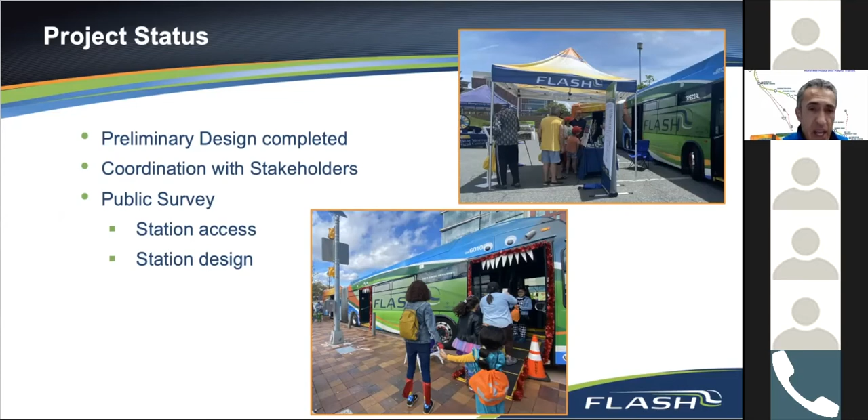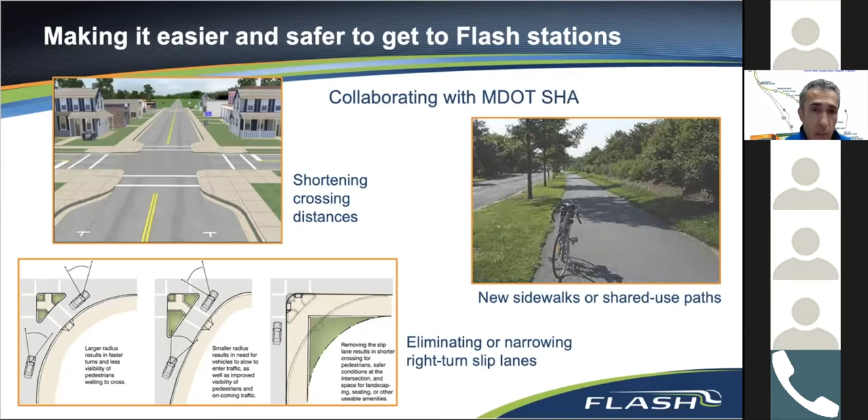These next few slides show some of the, I'll call them, changes as far as the geometric design we've looked at. I want to reiterate that the station locations have not changed, but what we tweaked or adjusted were things like the Q-jump lanes or issues having to do with pedestrian safety.

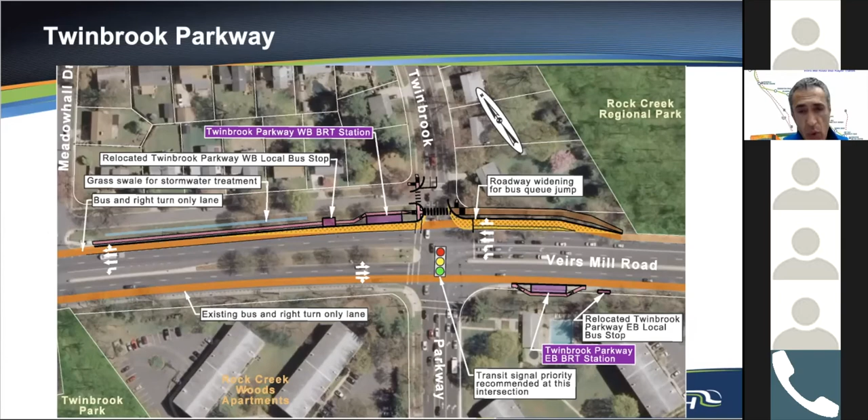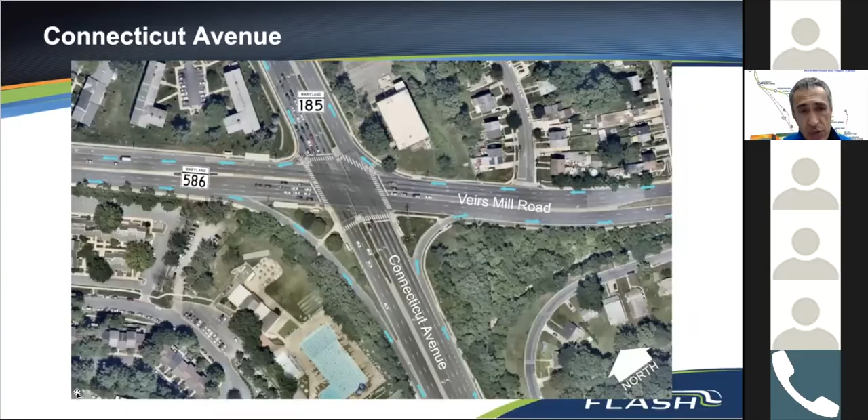This is Connecticut Avenue, and this is probably where we have the most significant geometric changes to what's existing today. If Scott can run the video, thank you.

This is the existing condition. If you look, there are slip ramps where cars are using to avoid the intersection. Now what you see is the modified version of the intersection where all the slip ramps have been eliminated. The longest one was from eastbound Veirs Mill Road going southbound on Connecticut Avenue. That long one has been eliminated, rerouted and shortened, and pretty much everybody has to stop before making the right turn.

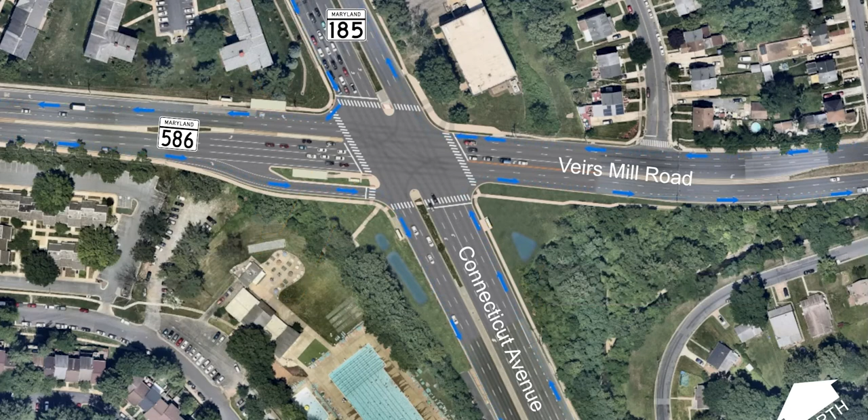Among the improvements are enhanced crosswalks and smoothed out, much easier to use sidewalks for pedestrians. The BRT station is what we call a floating station, in an island, as Scott is pointing out, and next to it is the relocated eastbound bus stop.

This intersection, on this slide, it's not as readily visible, but we also took advantage of removing the existing slip ramps and found space, or room, to put stormwater management facilities. So where there used to be slip ramps, now there's going to be a few stormwater management facilities. That's one of them that Scott was pointing to.

This is probably the intersection with the most significant geometric modifications once the project is completed. Next.

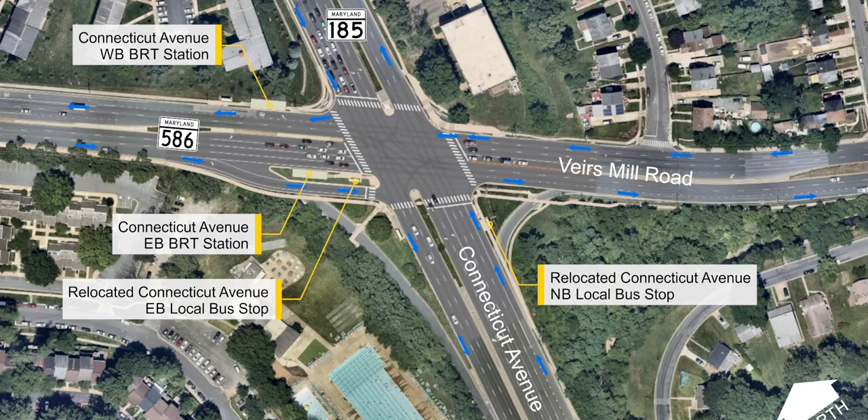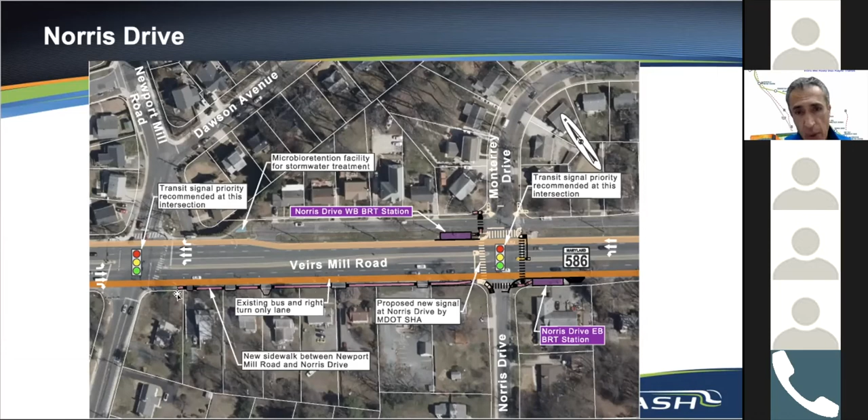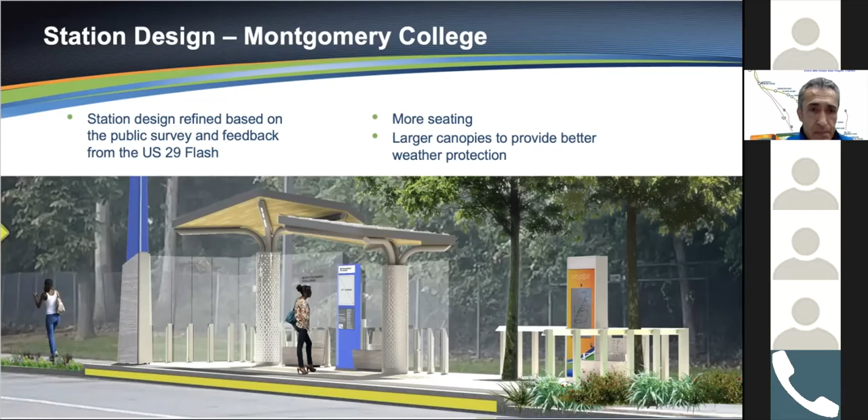And this is the proposed station on Randolph Road.

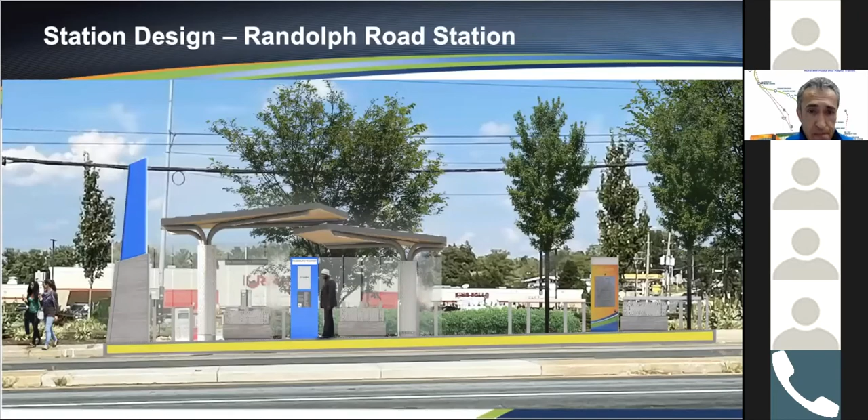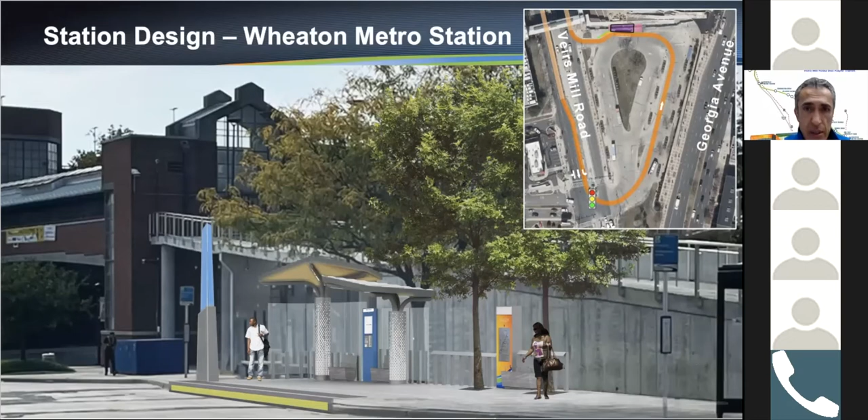Finally, this is the station at the Terminus Point, the Wheaton Metro station. In the image in the upper right-hand side, that's an aerial view. The orange line shows the path of the BRT line as it comes and circulates through the parking lot. What you see are all the various WMATA bus stops or Ride On bus stops along that route, and the purple one is the proposed BRT station. It is fairly close to the access to the metro station. So that is the location of the BRT station for Wheaton, and the image you see is the proposed design of the station. Next.

This is a good point to stop to take any questions you may have on what I have covered so far.

Michael, there was a question from Mike Stein. He says the county's bicycle plans imagine shared use paths along Veirs Mill Road between Twinbrook Parkway and approximately Twinbrook Metro Station. Have you considered installing those as part of the Veirs Mill Road project to improve access for cyclists and pedestrians? Thank you, Mike, for that question.

If I may say, sorry, this is Mike. I think I might have mistyped. I meant along Twinbrook Parkway, not along Veirs Mill Road. That's fine, I'll still address the question as though it was posed. In a manner of speaking, you jumped the gun — some of the topics we were going to talk about include pedestrian and cyclist facilities. If you just wait a few seconds, it might be better for me to cover it when we reach that point, so I will talk about that then. Thank you.

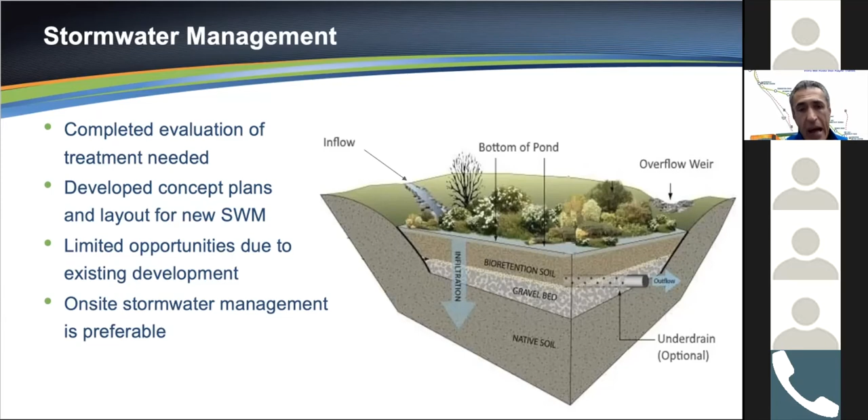I forgot to mention in the last slide, there are a couple of places where we have what we call offsite facilities. Most of the places where we are proposing these treatment facilities are along the corridor, or on-site. We do have a couple of small off-site facilities that are outside of the right-of-way corridor of this project.

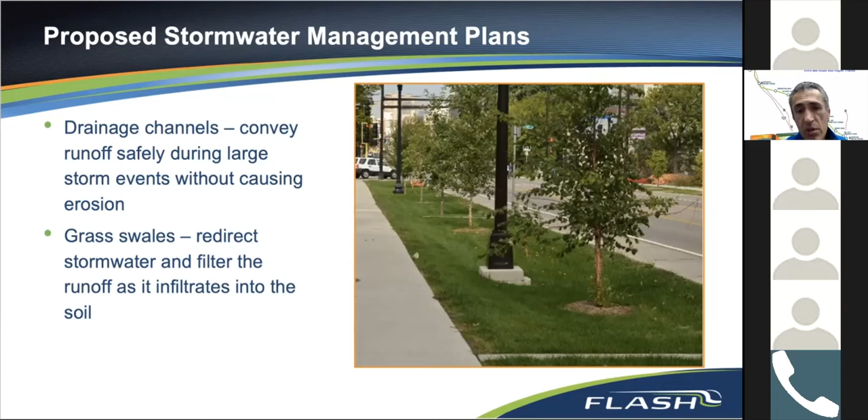That's the beauty of it, if I may use that expression - to the layman's eye, it just looks like grass or landscaping. But in fact, it is meeting the stormwater management needs and treating the runoff from the project. All of this reduces erosion, and the water is being treated.

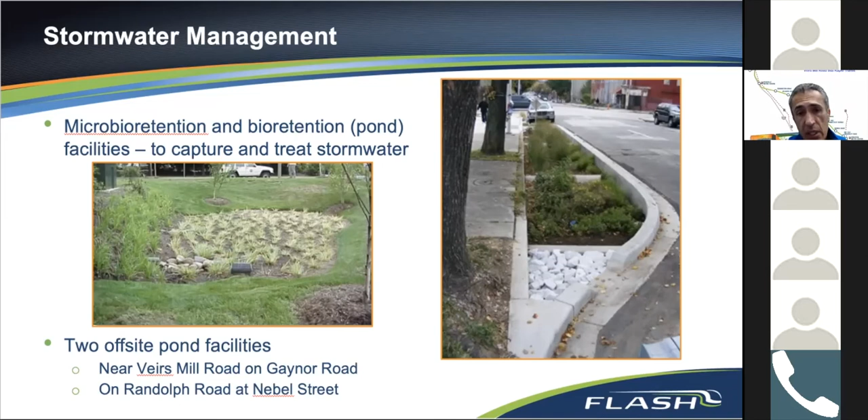As I mentioned, there are a couple of small offsites. One of them is actually very close to the corridor itself, on Gaynor Road near Veirs Mill Road, and the other one is on Randolph Road at Nebel Street. So those are a couple of offsites we have to meet the stormwater management needs for this project.

I want to emphasize that this system, TSP or transit signal priority, is not the same as what emergency vehicles use. They take over the operation of the signal altogether to make sure the ambulance or fire truck runs through the intersection.

The TSP for the BRT system improves the efficiency and operation of the BRT, and it also helps the whole corridor, including the other vehicles, to have much better travel times. We are planning for 20 intersections along this corridor to have TSP.

I know we had a comment about having more TSP. For people who may recall, when we came out of planning, we had only identified 9 locations. Now we are looking at making it 20 intersections with TSP. This is going to be one corridor with very good operations.

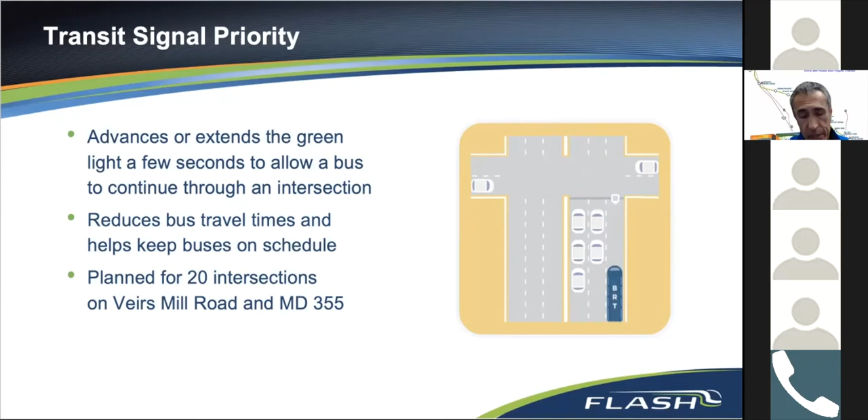As far as coordination with other projects, I briefly mentioned it. One of them is the BRT project along Maryland 355. That's a much longer corridor, and it's challenging too. We are coordinating with that. As I mentioned, about 1.5 miles, 2 of the stations on this corridor are along 355, so we are coordinating with that project.

The next one is there is a private developer near University Boulevard called Wheaton Gateway. We are coordinating with them.

And finally there are the BiPPA projects. BIPA stands for Bicycle and Pedestrian Priority Areas. There is one project, the western segment, which is already under design. Two other ones, the central and eastern segments, are going to get started with design soon. We are coordinating with that.

So people who attended the planning phase of the public presentations we made, we mentioned that one component of the project is improving the access to this BRT project, to the corridors. Within 0.5 mile of each station, we evaluate what we can do as far as having sidewalks or cyclist facilities for people to reach the station.

So as you can see, we are kind of expediting that as far as the BiPPA projects along this corridor. As I said, there are 3 of them: the western segment, central segment, and eastern segment. We are coordinating closely with those to see if we can bring those online, get them constructed at the same time that this project, the BRT project, is constructed.

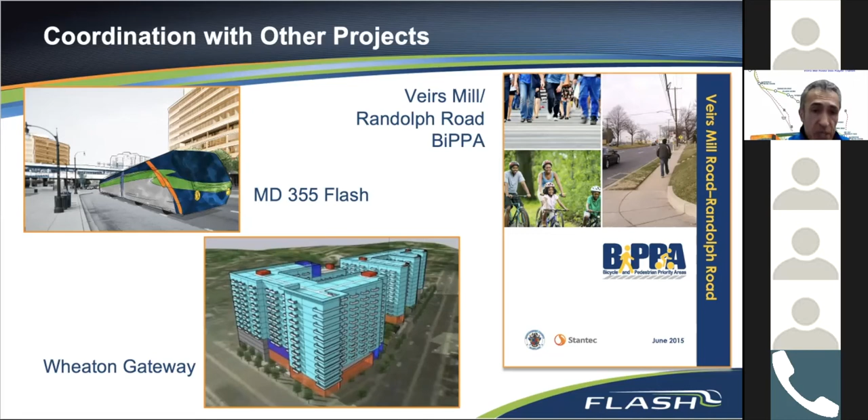As far as the schedule, as I indicated, the preliminary design is pretty much done. We're going to start the final design next year. That should take us about 2 years. In the spring of '22, next spring, we are going to go before Park and Planning, the board, for mandatory referral. In '23 and '24 is when property acquisition and utility relocations will take place.

And between 2024 and 2026 is construction. I want to say that there is an asterisk, as you can see, that's pending, contingent on getting funding for those phases for property acquisition and construction. And we expect that if we do get the funding, the corridor will be open and operational in 2027. That's the schedule right now.

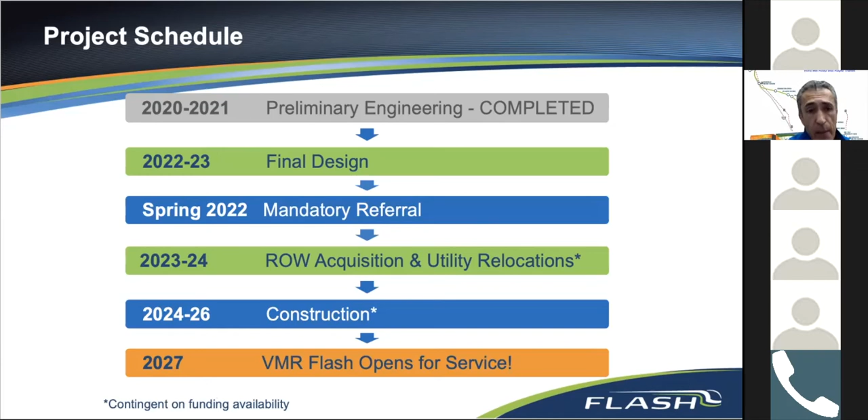Next step, as I mentioned, we're going to go before the planning board for mandatory referral. We also have been coordinating with the city of Rockville. We have to go before them. That's an entirely separate jurisdiction from Park and Planning.

We are looking into what we call delivery methods, basically how we take this project to construction. There are a couple of different methods we can use. We want to find the most efficient and quickest way to take this project from design to construction. So we are evaluating all the options.

As far as the funding, we are working closely with the Federal Transit Administration, applying for a small starts grant, and obviously we're looking for local sources as well.

As far as the final design, once we step into it, as with any geometric design project, we try to reduce the footprint, having as little as possible in terms of right-of-way impacts and utility impacts. Then we'll be fine-tuning, as I mentioned, as we learn lessons from the US 29 flash route, as well as the comments we get from citizens, the station design. So these are the things we will be looking at and working on during final design.

And we'll continue coordinating with the BiPPA projects and the 355 BRT project I mentioned earlier. And we will be evaluating the type of vehicles, the buses that we're going to get for this corridor. That's still under evaluation right now, trying to get as close as possible to zero emissions.

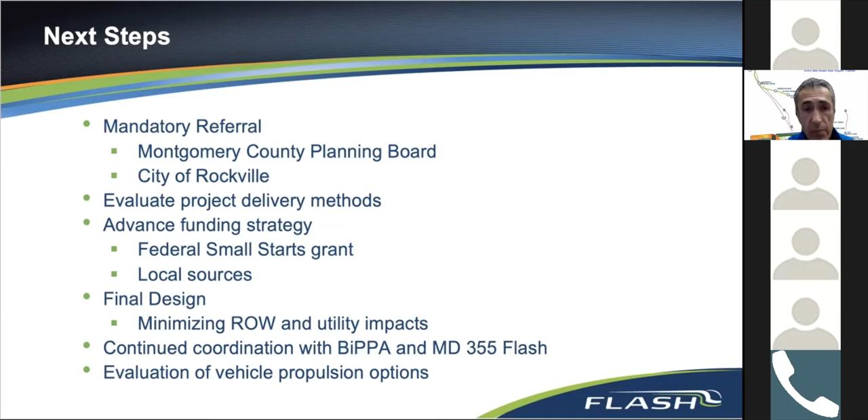That's the end of it. I believe the next slide has my contact information. The best way to get a hold of me is via email, michael.mitchell@montgomerycountymd.gov. That's my mailing address too, but I'll just reiterate the best way to get in touch with me is via email. So I will turn it over to Jennifer or you guys for any other questions you may have.

By the way, Mike, I hope I answered your questions on stormwater management or station design, but if I didn't, go right ahead.

So the stormwater management, earlier in the first part of the presentation, you were showing the maps. Is that inclusive of all areas that will be receiving stormwater management treatment, or were there other areas you didn't mention?

The reason I'm asking is specifically that, as you may or may not know, there was a tremendous amount of flooding where the station will be at the corner of Twinbrook Parkway and Veirs Mill from the remnants of Hurricane Ida on September 1st. The Rock Creek Woods apartments flooded, and a young man died while trying to rescue his mother. It was a localized heavy amount that fell, and a lot of that was due to runoff from Veirs Mill Road, as well as the neighborhood south of it, which is in the city of Rockville.

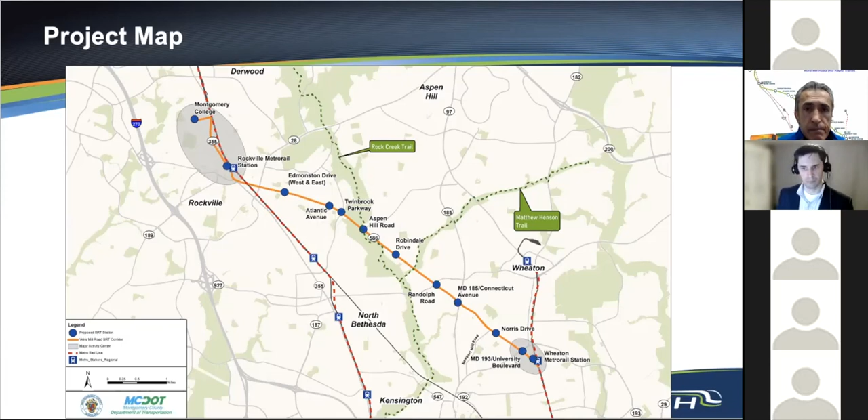Thank you. Sure. Michael and Corey, good to see you still at it, still serving the public. Keep it up. Thanks, Tom.